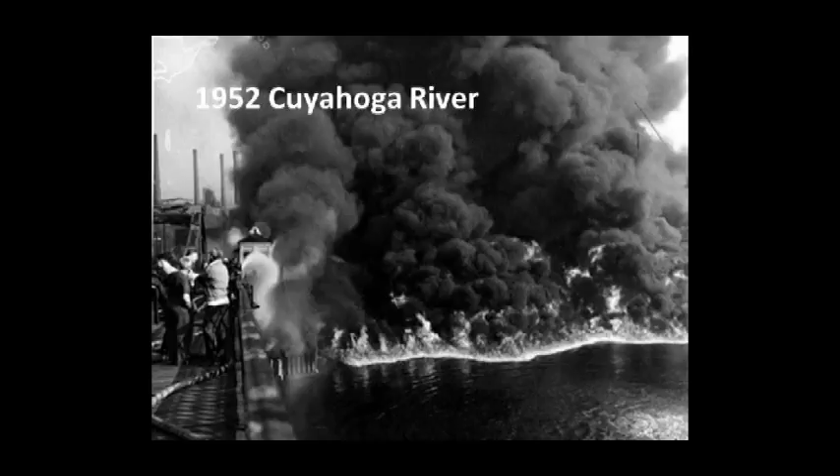I think it's important to really understand where we've been locally, so that we know where we need to get to in the future.

This is a picture of the 1952 Cuyahoga River fire, one of the biggest and baddest fires on that river. This river burned 13 times. Why is that? We were using the river back then as a sewer, essentially. And this is what you saw.

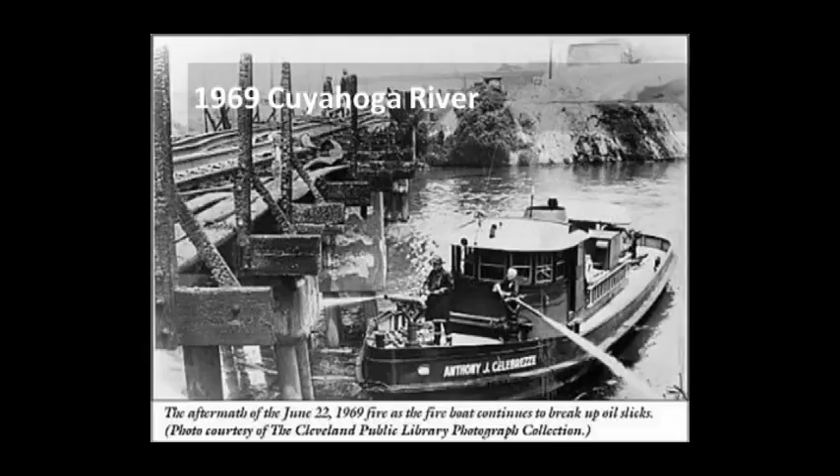This was one of the least disruptive fires, but one that garnered the most attention nationally. This was the 1969 fire on the Cuyahoga River that really sparked an environmental movement and ultimately led, 3 years later, to the adoption of the Clean Water Act, creation of the EPA, and a lot of good things in terms of cleaning up that river.

So today what we want to cover: we'll talk a little bit about the sewer district and our responsibilities. We're going to talk about the urban water cycle, one slide, but I think it's important for people to understand that we are taking water out of Lake Erie for drinking water purposes. You are using it, and it's our job to clean it up and get it back to Lake Erie to be protective of public health and the aquatic environment.

Sewer System 101 will cover the evolution of sewers, the first sewers in the region, how they've changed over the years, and some of the problems. We've got a wet weather day, so we're going to talk all about what wet weather means to sewer systems.

Once we collect wastewater from your homes and industry, we've got to treat it at our plants. Some of you will take a tour today. We'll talk in general terms about the treatment process, how we clean up the waste. And at the end, we'll show some graphs about some of the gains we've made in water quality, but also some of the issues and challenges we face going forward.

First, on the responsibilities: the district was created in 1972 by court order, because there were a lot of squabbles and lawsuits over service-related issues, water quality issues, basement flooding issues, a whole host of issues between all of the communities in our service area. So a court determined that a regional entity, known as the Cleveland Regional Sewer District, now the Northeast Ohio Regional Sewer District, would be tasked with taking on the big challenges, the inter-community challenges that the region faced.

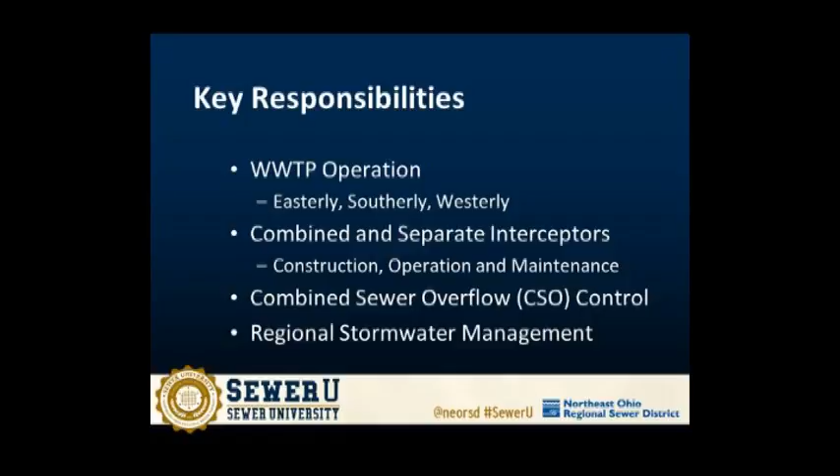We have the responsibility for what's called combined sewer overflow, and we're going to spend a good deal of time talking about what overflows are and what we're doing about them. And lastly, we're going to touch on regional stormwater management. I want to make sure people understand all the stressors on our streams and Lake Erie in terms of water quality impairment, and some of the programs we've got underway to deal with those.

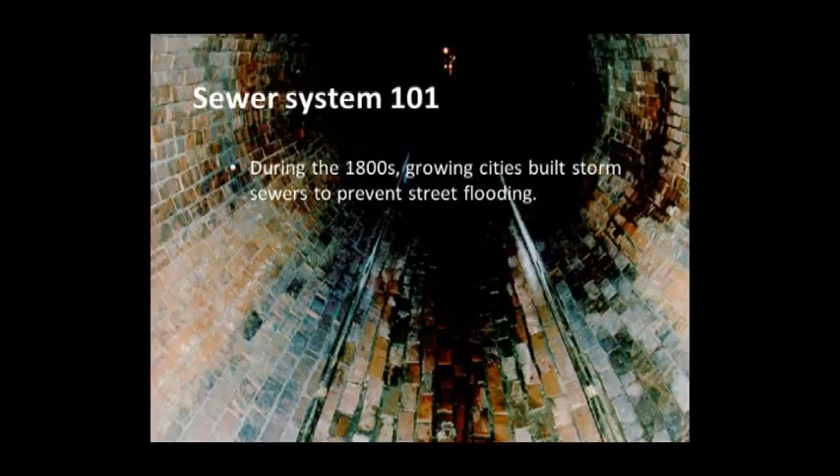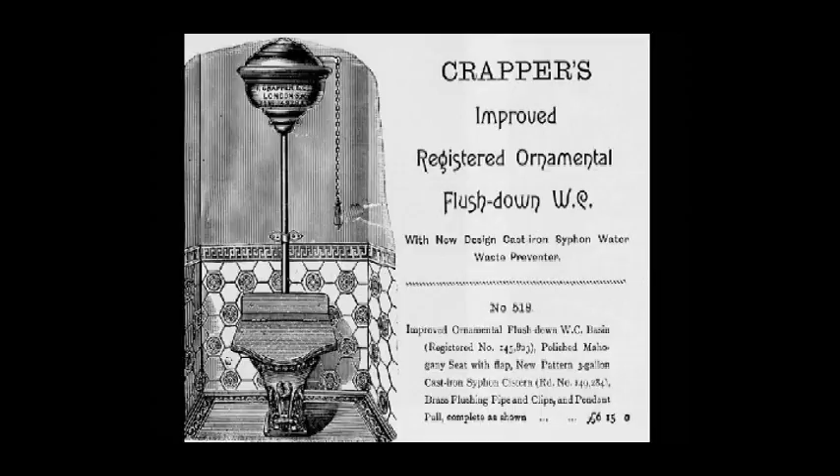Now this was the creation that really started things going, the crapper, the first toilet. I think this is vintage 1850s, 60s. Mr. Crapper invented a way to flush the waste from your house and get it away from you. It's a waste preventer, I guess it was called.

So that creation with water, the delivery of water to the residents of Cleveland, started to create much more waste that needed to be dealt with.

So in the 1880s and 90s, sanitary sewers from your houses, those little laterals, the pipes from your house, were connected to those storm drains. The reason was it was a mess on the streets. There's crap on the streets from the crapper, and we needed to get that waste off the street. That's a health problem.

So they started to connect the house laterals to these interceptors to get them off the streets, away from the people, and they started to divert those flows to a nearby water body, which at that time sounded like the right thing to do. There were no treatment plants back then. It was just collect the waste, collect the storm water, get it away from people, get it to the nearest body of water.

Now this is a quote, I think his name was Robert Hering, City of Cleveland, back in 1882, and he theorized that combined sewers was really the matter of choice. He called it a matter of choice because there was so much organic matter and junk on the streets, and I think there were still horses rolling around at some point. So you had a bunch of organic matter on the streets, and a lot of waste being generated because of inventions like the crapper and water coming to your house.

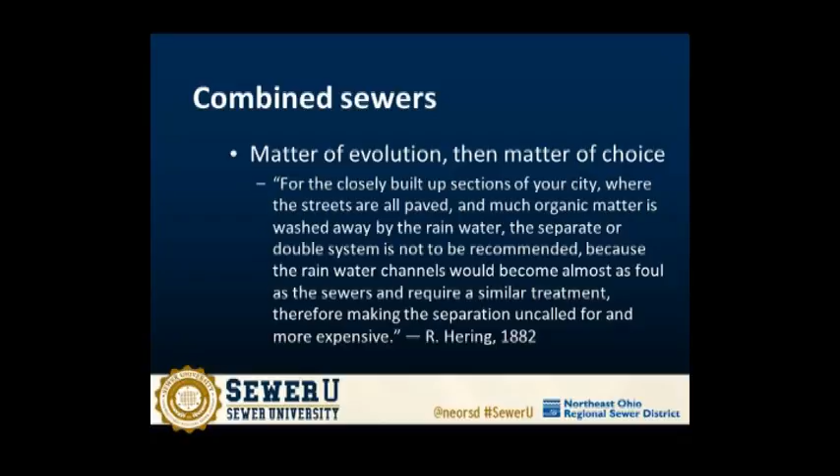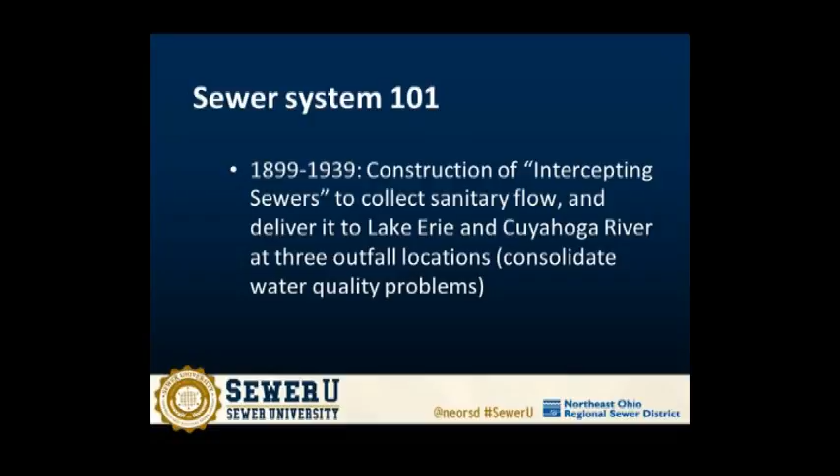So between the late 1800s and early to mid 1900s, intercepting sewers were constructed to start to intercept these waste flows and delivered those flows. There was a piecemeal construction of sewers to get the flow away from the people. Then we wanted to consolidate all these piecemeal sewers into what we call an interceptor, and get it to the lake or get it to the Cuyahoga River in a convenient spot.

And that's what they did. Now, interestingly enough, the locations of these interceptors and where they outfall to the river are really the exact locations of the Easterly, Westerly, and Southerly treatment plants today.

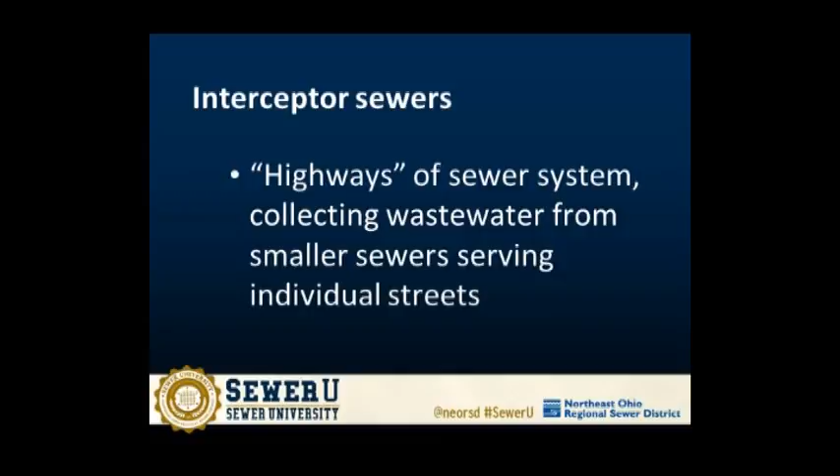So our interceptors are the highways of the sewer system. They collect waste. At that time, they collected wastewater and took it right to the river or the lake. Today, they collect waste from the community sewers and take that waste to our treatment plants. Again, dilution is the solution to pollution.

That was the mantra. I'm a lifelong Clevelander, and I remember in the late 60s and early 70s some of the bumper stickers that said that: dilution is the solution to pollution. And what we've learned over time is that is not true. It certainly wasn't true back then, and they quickly realized that taking waste to 3 points along the lake and the river was not the right solution.

So as treatment plants were constructed in this area, nationally, I think this area led some of the earliest treatment plants across the country. There's great debate as to who was first, Easterly, Westerly, Southerly, and what was the first date. But some of the rudimentary treatment plants were constructed as early as the 1920s.

In '38, some of the more sophisticated plants that we see today were constructed at those 3 outfall locations, because it was now felt that we've got to treat this waste. It's harming Lake Erie, it's harming the Cuyahoga River, and we've got to do something about it.

So now we're going to talk more about the combined sewer system and its evolution. As the area continued to grow, devices were built into the combined sewer system called regulators. You think of them as a dam. These regulators allow flow to go to the treatment plant in dry weather and in wet weather.

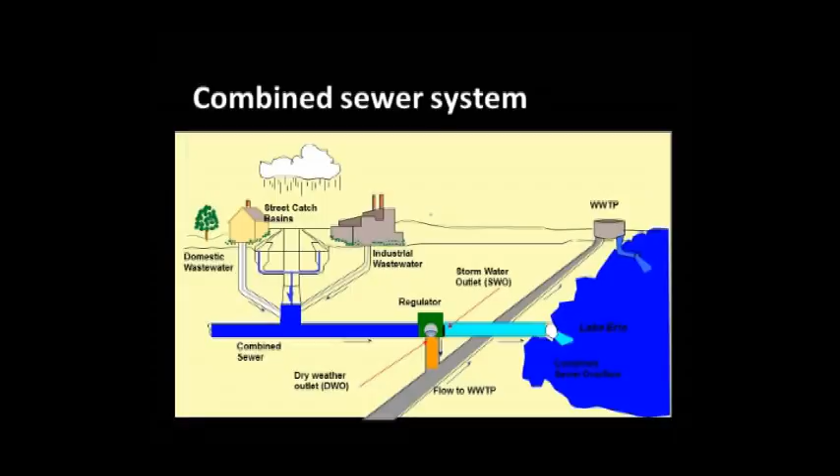But because there was a lot of street flooding and basement flooding when these combined sewers filled up, some of that flow was allowed to overflow to the nearest water body. It was really to keep it out of the basements or out of the streets. And those are called combined sewer overflows.

This is what it looks like inside the pipe. There's a couple different configurations for these regulating structures. You've got side spill weirs to the left, overflow pipes to the top right. In dry weather, the flows are typically pretty low in the system, and all the flow gets to the treatment plant.

When it rains like today, those combined sewers start to fill up because of the street runoff, and what we see is the flows in the sewer elevate. They get to a point where to the left there's a weir, a long weir, like a dam. Once they exceed the height of that dam, that's a combined sewer overflow. Those flows are no longer going to the treatment plant, they're going to the nearest water body.

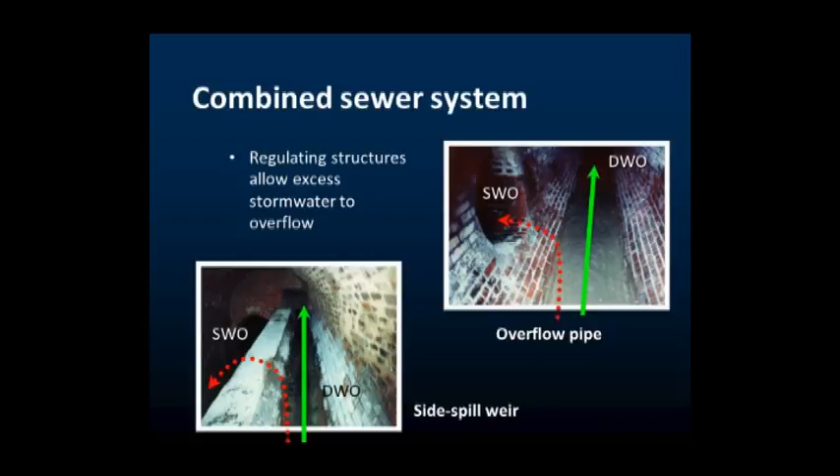And all of our urban streams in our service area receive at least one combined sewer overflow, and many of them, like the Cuyahoga, Mill Creek, and others, receive numerous combined sewer overflows.

Newer configurations: back in the 70s, the district and I think Milwaukee were some of the first pioneers of what we call automated regulators. Some of the bigger interceptors that had a lot of capacity to store flow during wet weather, we built automated devices, either inflatable dams or hydraulically operated gates, and we raise the dams when it's going to rain to allow the flow to back up and fill the pipe to a point where we're preventing overflow, and then once the rain has ceased, all of that flow can discharge to our treatment plants.

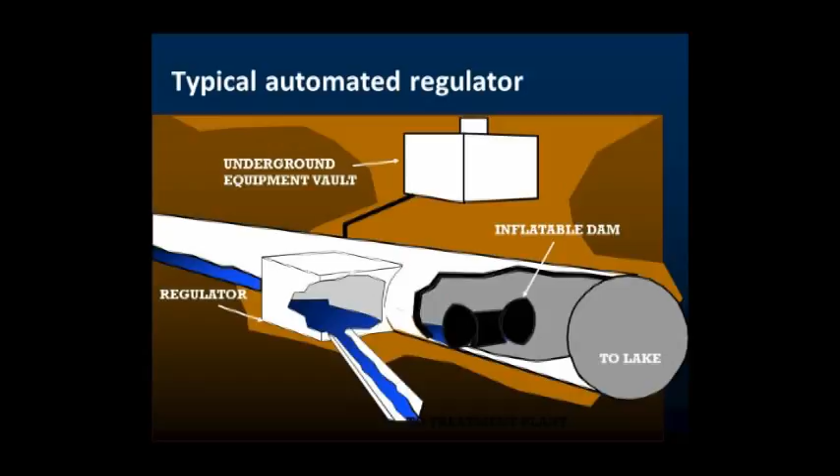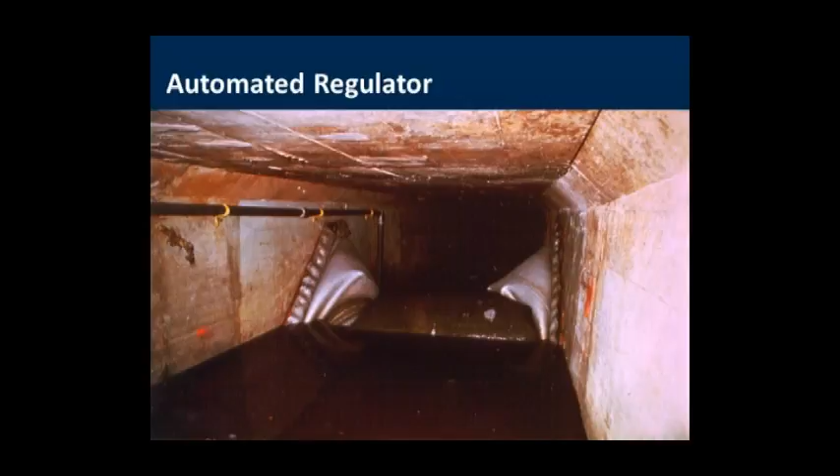This is an example of an inflatable dam, partially inflated, but as the bag comes up, the flow ponds behind it. If we didn't have the bag, that flow might overflow to the environment. This was a measure performed in the 70s and 80s to start whittling away the combined sewer overflow totals that this region faced.

Back at our inception, we're estimating over 9 billion gallons of combined sewer overflow. We're talking raw sewage mixed with stormwater overflowing to the environment.

This is what it looks like when it hits a stream, and this is kind of an odd photo. It looks very picturesque, doesn't it? That water flowing over those rocks coming out of that flap gate looks great. That's combined sewer overflow. That's a raw sewage discharge.

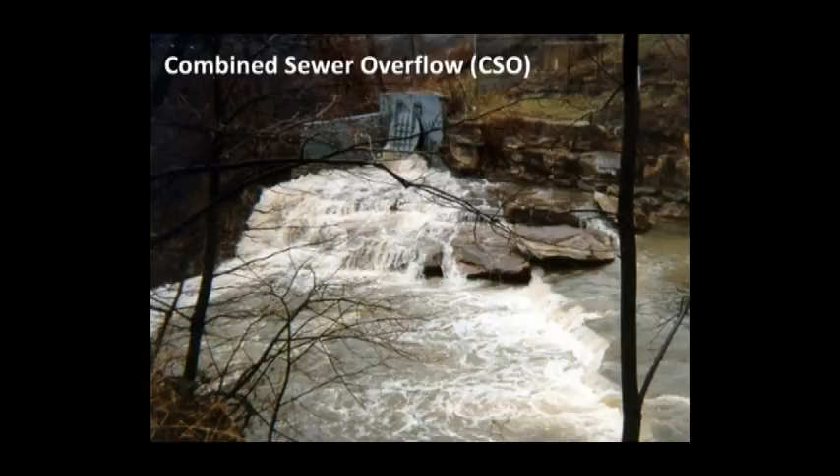Now the good news, and this is on Mill Creek, at the Mill Creek Falls. The good news about this is this was once a very frequent actor. I think this one overflowed at least 100 million gallons per year, numerous times. On a day like today, it'd be overflowing.

Through the construction of the district's Mill Creek Combined Sewer Overflow Tunnel and a number of other ancillary projects, that overflow is gone. It's physically gone. The flap gate's removed, the rocks were reconstructed, and it's actually an overlook now. I believe it's a Metro Parks overlook, which is a really good thing. It's a nice gain forward.

But all of the other urban streams in our area, Dugway Brook, 9 Mile, Euclid Creek, Green Creek, and others, receive at least one or multiple discharges.

Combined sewer overflows, CSOs, impact water quality because you have a mix of wastewater with stormwater, and stormwater is not pure. In an urban environment, stormwater running off the streets or your yards is contaminated with metals, brake lining, oils, greases, dog poop, and the natural environment. So stormwater is also contaminated.

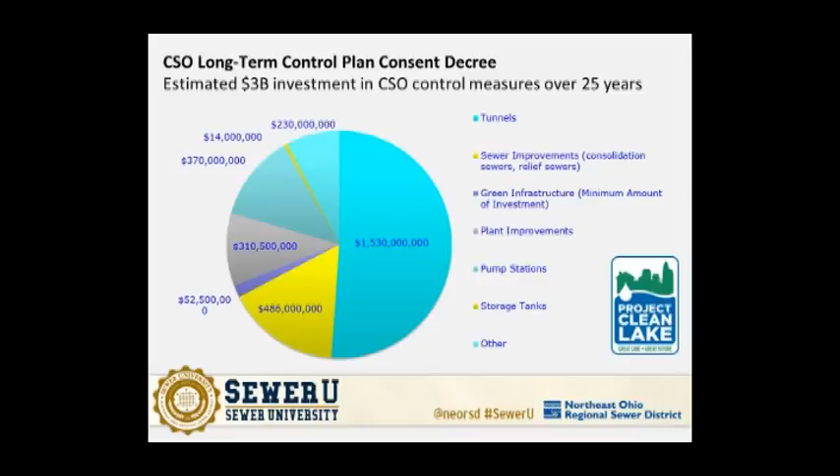Without getting too technical, this pie chart gives you some idea of the types of projects in the $3 billion program. The light blue is the tunnels. That's really the guts of our program: building large storage tunnels underground to take those overflows we're discharging to the stream and drop them into the tunnel. The tunnel is a large, 24-foot diameter structure. Euclid Creek was our latest. These are very large, holding 70 million gallons or more of overflow.

We drop the overflows into the tunnel, so they're not going to the stream anymore, which is good. The tunnel holds those flows, and we take them to our treatment plant for full treatment, which is also good. So that's a very significant water quality gain in any area we're working on for combined sewer overflow management.

There are a number of other projects, including green infrastructure projects that the district has pursued and will continue to pursue. One way to manage combined sewer overflows is to get stormwater out of the combined sewer system. Where there are available properties and green space to allow rainwater to percolate or slow it down and hold it for a while, we're taking advantage of those opportunities.

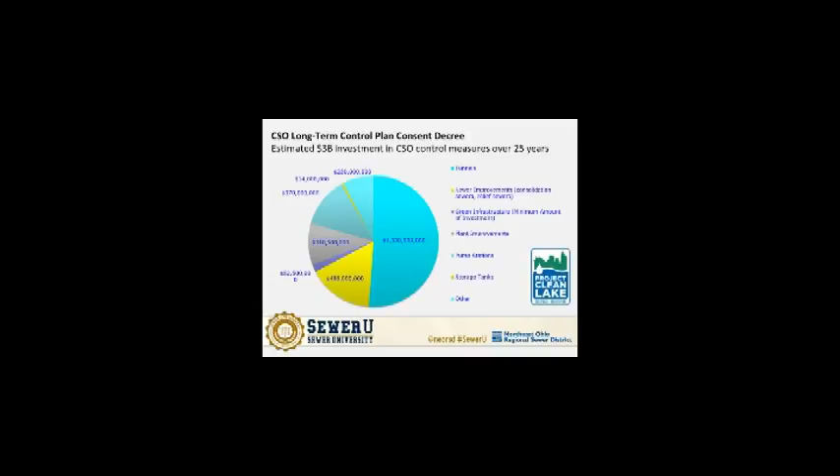There are a number of plant improvements on this graphic - I think it's the 310 million dollar total. So there are some significant upgrades at the treatment plants to provide more capacity and treatment ability in wet weather so that the treatment plants can continue to perform. That's a key component. Good question.

Bid at 198, came in at 195, which is good. And this tunnel is finished, it's waiting for flow. As soon as that pump station is complete in 2016, sometime during 2016, we will turn that tunnel on and start to see overflow discharges going into the tunnel and away from the beach.

That's the cutter head on the Euclid Creek Tunnel - I think they named it Mackenzie. There's diamond bits on the cutter heads. We dropped this machine - I think it's 300 to 600 feet in length. It's dropped into the tunnel, constructed there, and then the mole is in the hole and it goes for 3 miles. It takes 2 to 3 years to mine out, and we're between 120 and 200 feet deep. So this machine is mining in rock.

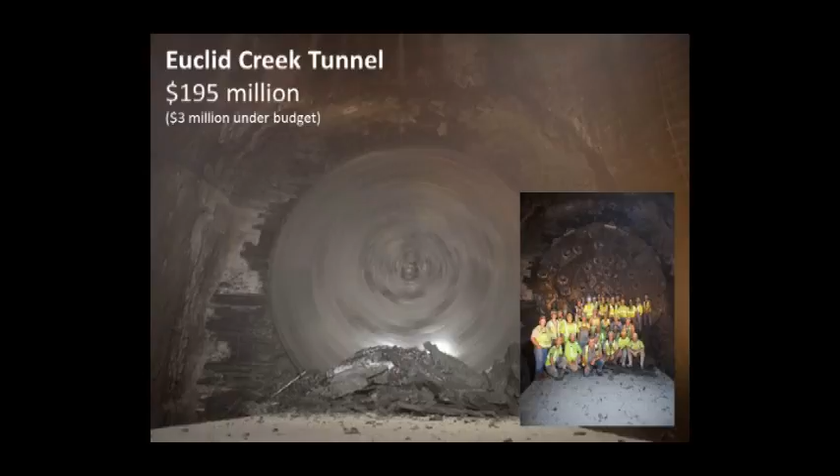That's the cutter head breaking through at the terminus of the project. Obviously for the construction workers this is a big day, so they've got a big ceremony going on. This project worked beautifully - tunneling underground can be tough, but we had no major issues, on schedule and under budget. And that's what it looks like inside.

These tunnels are lined. Once you mine - and it's shale, Chagrin shale - once you mine it, you line it. It's a concrete liner that followed the machine step by step as they were mining. And that gives you some scale for how big these tunnels are.

For the mining, did that go through any residential area? Like, what did it feel like to have that thing going under your street?

Typically, we try to stay within the right-of-way. We don't like to mine under houses and structures, but we have to, because you cannot turn mining machines on a dime - there's certain radiuses and curves. We're a couple hundred feet deep. Sometimes there's blasting involved; where there's blasting, we do pre-surveys for the residents to make sure there's no damage caused by our tunnels. When you're 200 feet down, the impact at the surface is typically negligible or non-existent - it just depends on your depth and the type of mining you do.

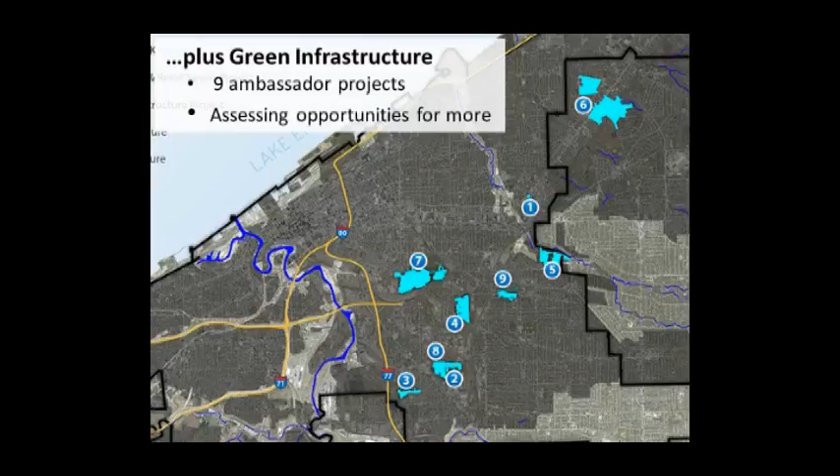If you can keep water out, that's less potential for water to overflow during a rain event. This is an example of a green infrastructure opportunity at the Marriott redevelopment. This is in the University Circle area.

There's sand underneath this site. Our area is pretty heavily laid with clay, which is not great for infiltration, but there are sand pockets, old beach ridges. This area happened to have sand underneath, so it was ripe for infiltration to take the stormwater off the parking lots and the impervious surfaces and send that water into the sand and keep it out of the system.

This thing's worked beautifully. It's been in operation a couple years now, and there's been no stormwater runoff coming from the site up to 100-year storms. We've been heavily monitoring this. That site would have generated a pretty significant amount of stormwater runoff before the technology was put in to the combined sewer system. We're not seeing it. So that's a good example. Now, we don't have that opportunity everywhere, but where we do, we want to take advantage of it.

Public Square, you've heard a lot about transforming Public Square. We wanted to make sure at Public Square, since you're creating green spaces and changing the landscape, we do the right things to capture stormwater through green infrastructure—either reuse it, hold it, or get rid of it. So there are some significant district investments in the Public Square project to use green infrastructure technologies to pull water out of the combined sewer system.

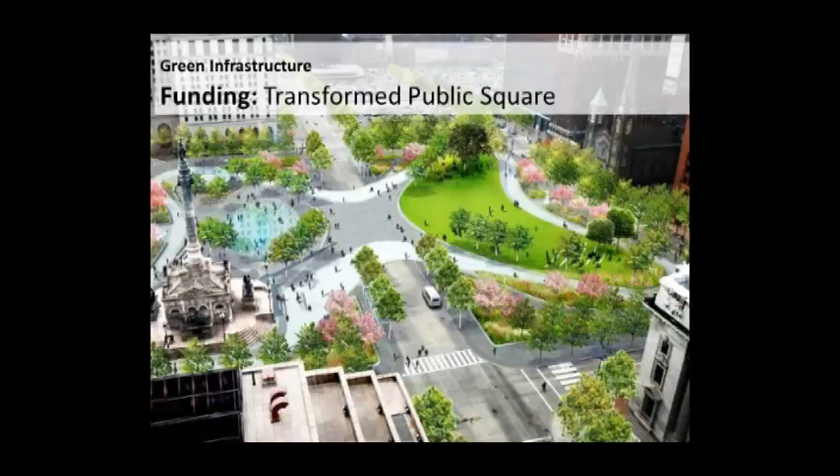We've got a quick video that explains some of the work at Public Square. Dave Ritter, Stormwater Technical Specialist with the Northeast Ohio Regional Sewer District.

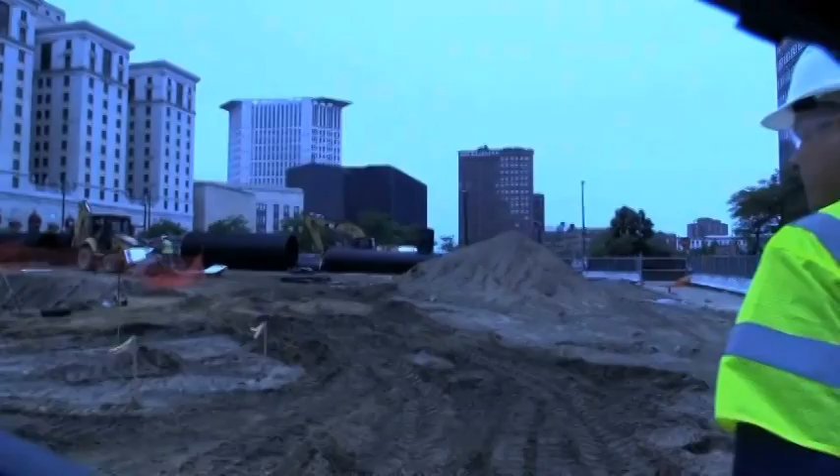Today we're here at Public Square to take a look at the rainwater harvesting and infiltration system that's going in as part of the project. Originally, the runoff from Public Square was caught in catch basins and directed to the combined sewer system. The combined sewer system during dry weather flows to our Easterly wastewater treatment plant. During large storm events, it was designed to overflow, and those overflows went directly to Lake Erie.

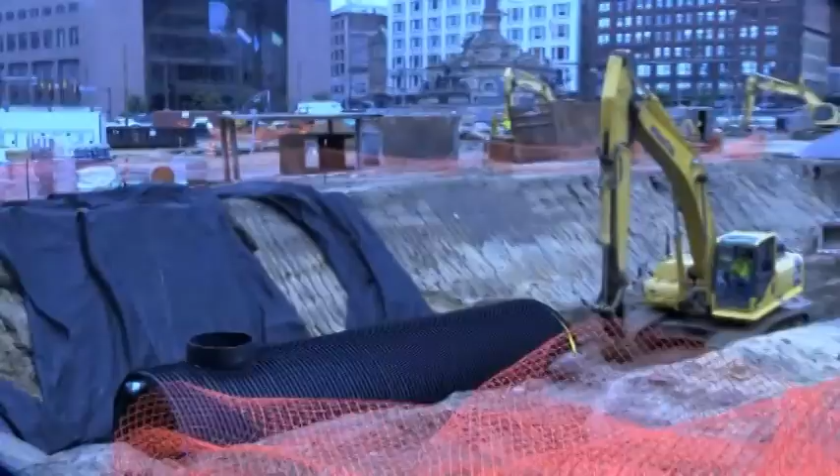The sewer district saw this as an opportunity to capture stormwater in a highly urbanized environment, and was able to work with the Group Plan Commission to leverage the work that was already going on here at Public Square. There are two systems going in as part of the Public Square project. The one behind me is the rainwater harvesting and infiltration system.

Rainwater runoff from the site is going to be captured and reused for irrigation. During the times of the year when irrigation isn't necessary, the water will overflow and infiltrate into the ground itself, thereby capturing about 1.6 million gallons. Between the two systems—the rainwater harvesting and infiltration system, and the perimeter permeable paver tree infiltration system—it's designed to capture about 3 million gallons a year.

This is a once-in-a-lifetime opportunity to do some improvements right in a highly urbanized downtown area to remove stormwater runoff from our combined sewer system.

So it doesn't look like they're super far along.

Okay, so that's it on combined sewer systems and combined sewer overflow. The combined sewer system essentially brought the region from waste on the streets to waste being directed to treatment plants. But as the area continued to build out, we laid more streets, more property, more impervious surface, so there's more stormwater runoff. Combined sewer overflows came to be because of the outmigration and the building out of our region.

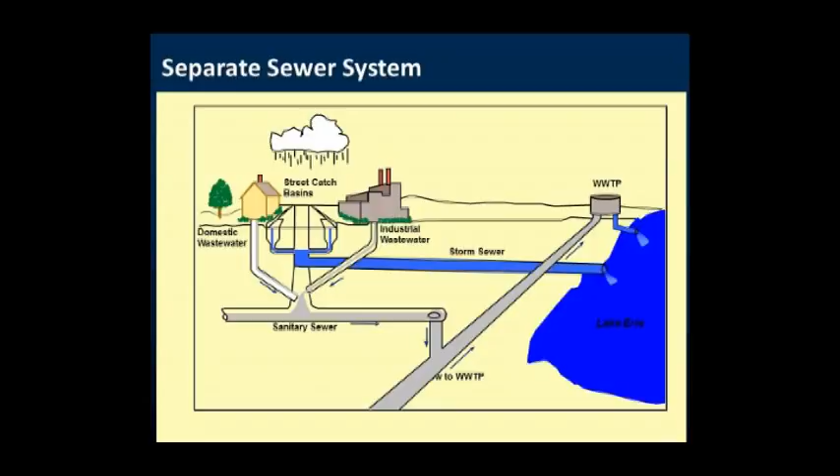As we continued to build out, now into the 1900s, separate sewer systems came to be in this region. A separate sewer system differs from a combined sewer system in that we have two separate sewers. One's a sanitary sewer that collects waste from your homes and industry and takes that waste to a treatment plant. A storm sewer is also in the street to collect rainfall runoff from streets and from your properties, and the storm sewers are routed to the nearest stream or directly to Lake Erie.

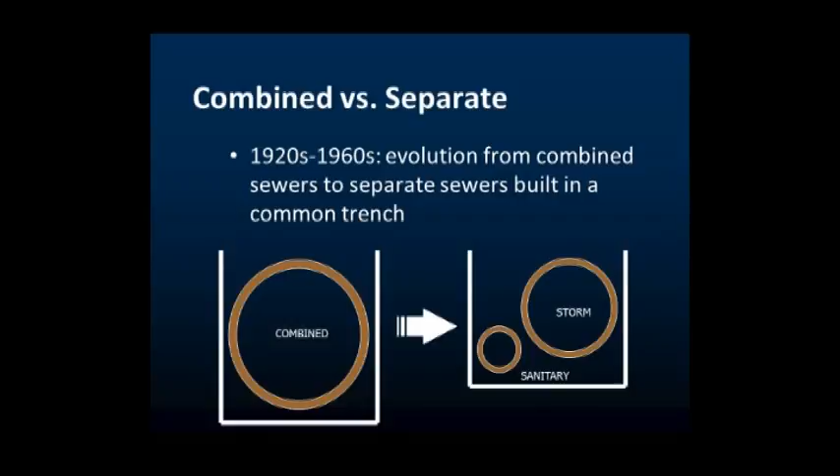Separate sewers evolved over time, not just here in Cleveland, but nationally, although there are some unique sewer systems in the Cleveland area and a little bit in northern Kentucky that are kind of unique to this area. I really don't know why. Perhaps it was the contractor at the time.

But the first evolution was to take, instead of a combined sewer, a separate sanitary and storm sewer, but dig just one trench. Obviously I think it was a cost savings, and there's a lot of rock in certain areas, so it can be expensive to mine through rock. But they put the sanitary and the storm sewer in the same trench. Now when you dig a trench, trenches fill with water. So the problem is, even though you have separate sanitary and storm sewers, because they're in the same trench, there's a lot of potential for intermingling of flows.

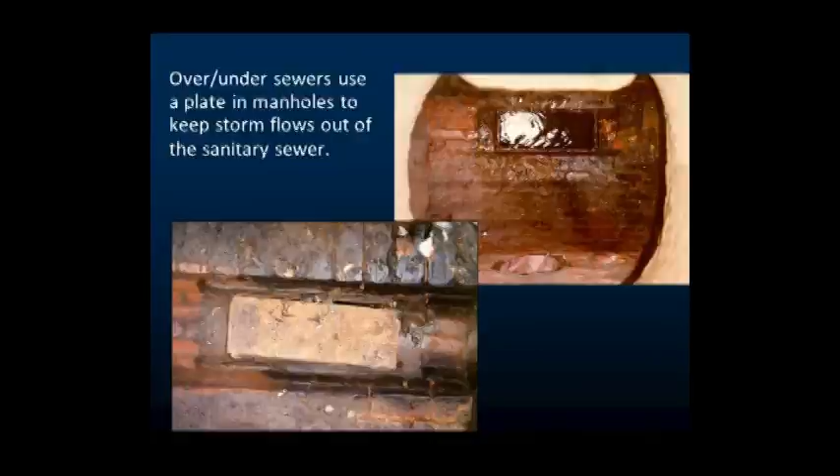So that was the evolution from combined to separate. The true separate systems, where we built sewers in separate trenches, was the next evolution. They even predate the 60s, I'm sure, in certain areas. But now we started to dig separate trenches, one for the sanitary, one for the storm. These tend to be tighter systems, but these are very old systems in our area - some are approaching 80 plus years or 100 years old. So there are a number of other problems which we'll talk about.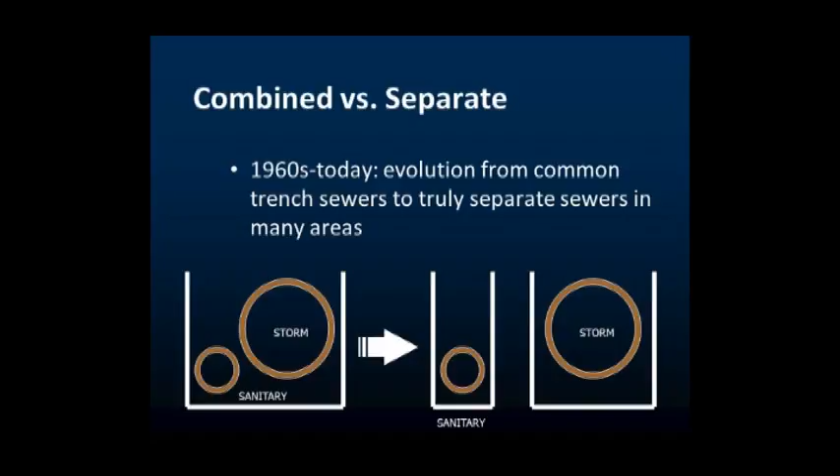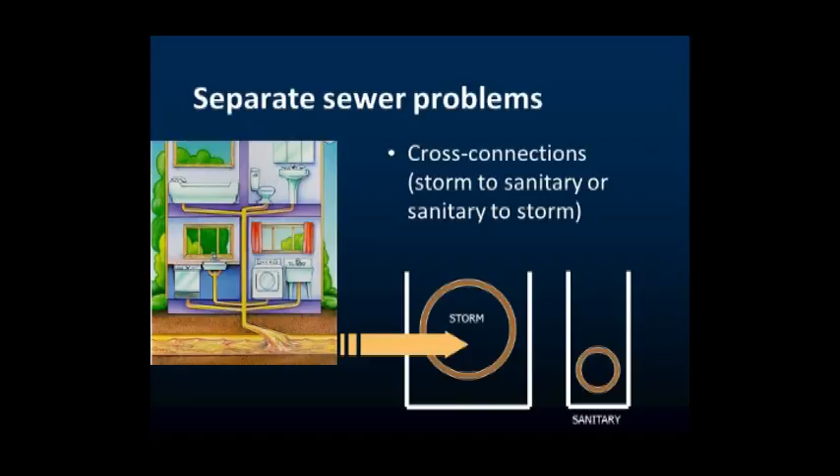Separate sewer problems - just because you have two sewers doesn't mean you have no problems. We have plenty of problems across our service area in the separate sewer area. There's a number of things that can happen. First is cross connections. Your downspouts on your house are supposed to be connected to the storm sewer lateral, the little pipe that comes off your property, so all that rooftop water is not supposed to be in the sanitary sewer, it's supposed to be in the storm sewer. In some areas it's not.

In the transition, some engineers back in the day felt that because we're taking all the storm water out of the system and we're not going to have a combined sewer, the stuff you flush down the toilet is going to settle. We need some flushing capacity to flush that waste so you don't muddy up your sewer system and block it up. So they intentionally connected footer drains, foundation drains, or downspouts, because that was the thought at the time. So you really can't fault them. Those downspouts in sanitary sewers cause problems.

We have other problems on sanitary sewers. Because we have the wrong connections, we have storm sewers tied to sanitaries, but we also have an issue where a lot of the sanitary sewers from the homes are tied to the storm sewer. So people are flushing their toilets to the stream, and this is a bigger problem than you might think. It depends - if a contractor comes out to fix a problem and you don't have good inspection, they're going to tie that pipe to the closest pipe they can see, and sometimes it's the right one, sometimes it's the wrong one. We call these illicit discharges, and we're very diligent at finding and looking for these, working with communities to get them corrected. It should not be happening in the 21st century, people flushing toilets to the stream. But it happens.

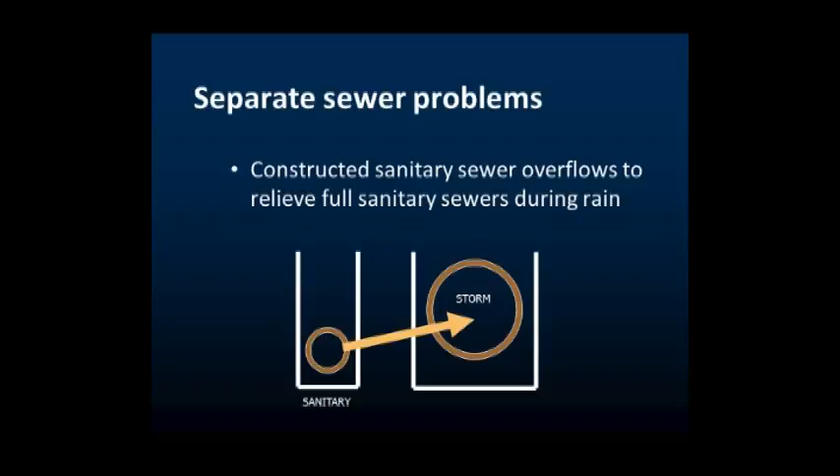As the system built out and grew, the capacity of the sanitary sewers started to be compromised. These sewers got old and have cracks and leaks. One thing people need to understand is that about 50% of the sewer system by length is on private property, roughly a 50-50 split. The homeowners own that portion of the sewer system, while the public entity owns the sewers in the right-of-way. As sewers age, cracks and leaks can occur on either side of the fence.

It's tough to deal with private property issues, so correcting basement flooding is a dicey proposition, partly due to the reluctance of certain communities to spend public money on private property, and the reluctance of property owners to do the same. It's a very tough situation, and not just here—it's nationwide.

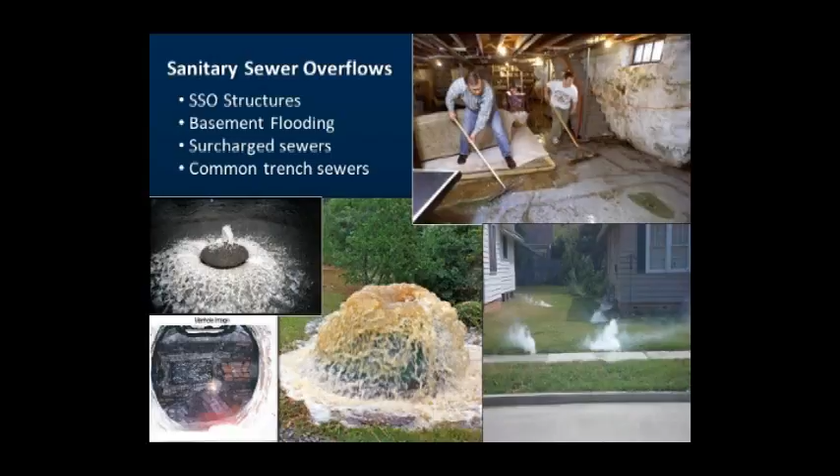When we overload sanitary sewers, we see this happening a lot lately in every area. It's not concentrated in any one community. Some communities have older sewers where it's more problematic, but you can get what we call surcharging manholes—you can actually blow manhole lids because the system is under pressure from too much water in the sanitary sewer.

So it'll either pop the manhole lid and spout geysers, or back up flow and spout geysers in your basement, filling it with a combination of stormwater and wastewater. Obviously a huge health hazard and a big issue, and it's all caused by extraneous stormwater getting into the sanitary sewer system.

Inflow is more of a direct connection with lots of water—like a downspout that's supposed to go into the storm sewer system, but sometimes comes into the sanitary sewer instead. Not a good thing, since you didn't build capacity for downspouts in your sanitary sewer. Same thing in the streets: catch basins collect street runoff, and once in a while a street catch basin is tied to a sanitary sewer, which is a huge influx of stormwater that can quickly overwhelm the system.

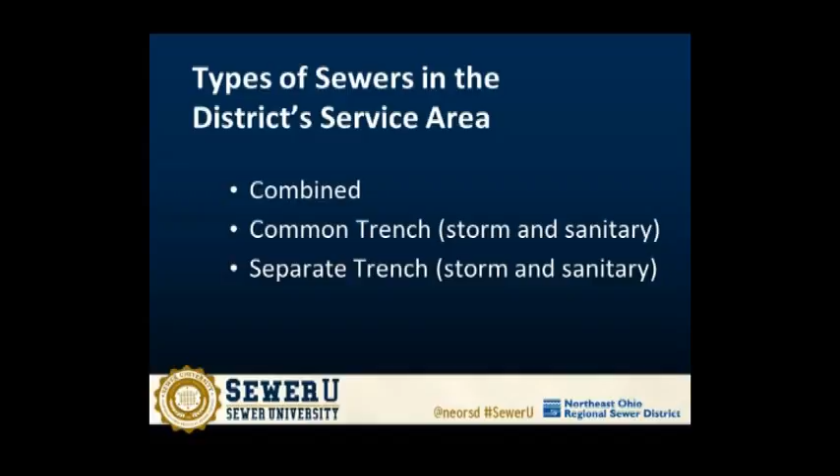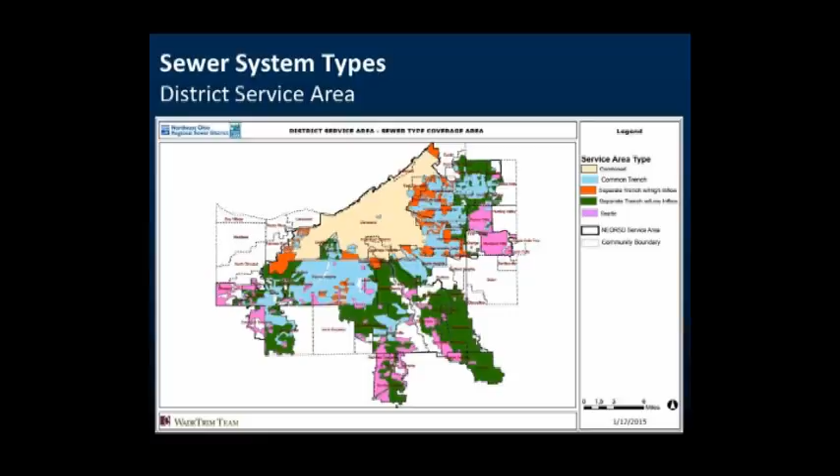To put it in perspective, we are a regional entity. We've got the highways, the interceptors, so we've got about 312 miles of pipe. We're dealing with wastewater treatment plants, making sure the interceptors are functional, and dealing with the combined sewer overflow issue. That's on the district's plate.

In the communities, there's more than 10 times the amount of sanitary and combined sewer pipe, and these are just the lengths in the public right-of-way. This doesn't include miles of pipe on private property. You can essentially double that total. And those are the responsibility of the communities.

So when we have basement flooding, when we have illicit discharges, when we have septic tank issues, those fall on the community to deal with it. But obviously these systems are linked, so we've got to work together to solve the problems that exist.

Question: with the district-owned pipe and the locally owned pipe, does the $3 billion cover the district-owned pipe, or does it cover both district and locally owned? The $3 billion of investment are targeted at, really, more district-owned facilities, so it's pipes or overflows.

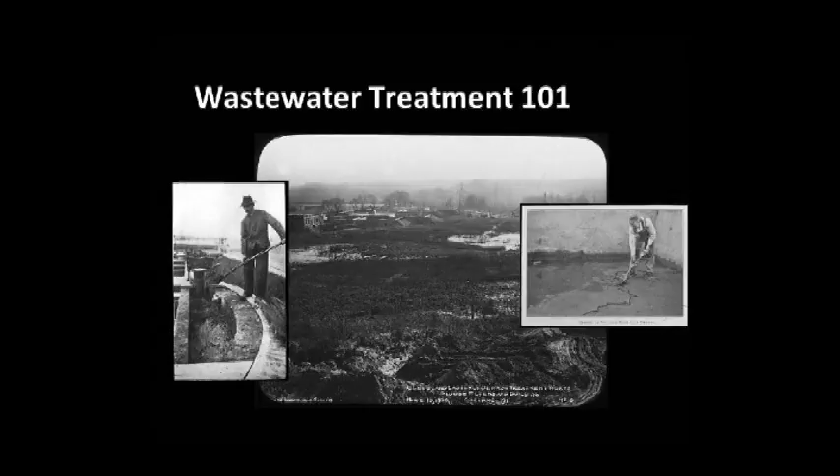Okay, I'm going to now shift to the latter part. We're going to go through wastewater treatment plant 101. Now we've collected the wastewater, we're starting to build facilities to prevent overflows, but we're delivering a lot of flow to our treatment plants. So these are some pictures of construction way back in the day—we're talking the 20s and 30s, where treatment plants were built locally.

Secondary treatment: because there's a lot of organics in the waste stream and other pollutants, we introduce microorganisms, bugs, that like to chew and feed on organics. As they chew and feed on organics, they reduce the level of organics, and we allow them to settle out. Then at the end, we disinfect, using sodium hypochlorite, bleach, to kill off any E. coli organisms that remain before we discharge.

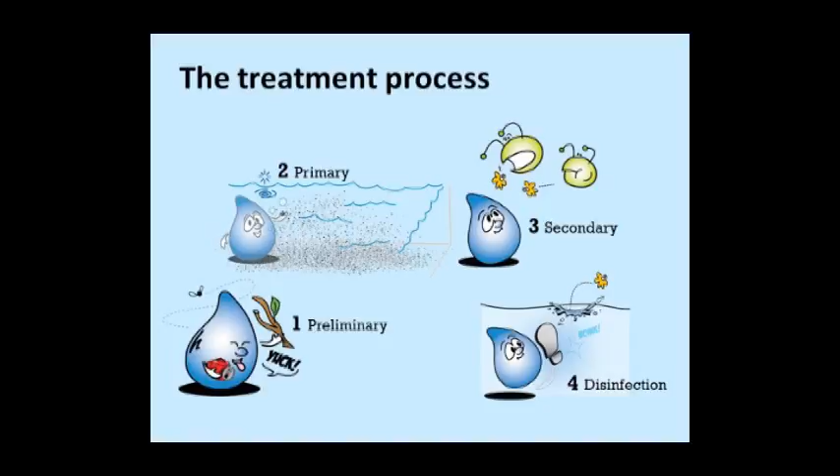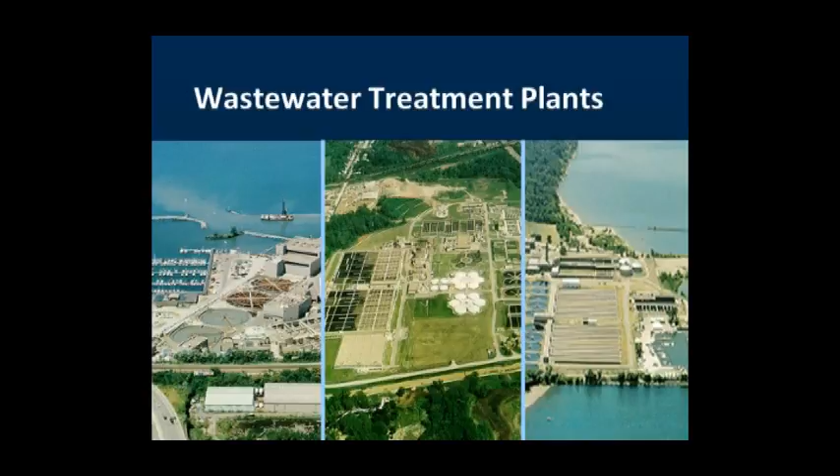These are pictures of the 3 treatment plants again: Westerly on the left, adjacent to Edgewater State Park; Southerly, which some of you will tour, in the middle; and Easterly at East 140th and Lakeshore Boulevard. Southerly discharges to the Cuyahoga River, while Easterly and Westerly go to Lake Erie.

Frank? Yes? I know there's a lot of construction right now at the Easterly plant. How's that gonna compare to Southerly when all of that's done? Southerly's going to have its fair share.

All 3 treatment plants, we will build some facilities to augment and increase the wet weather treatment capacities, like your question earlier. We're going to build facilities to make those treatment plants able to treat more wet weather flow annually. So we looked at what the combined sewer system might bring, what the treatment plants can do, what the regulations say, and we're going to upsize the capacity at all 3 units. There'll be significant construction at all 3 plants.

Is that chemically enhanced high-rate treatment? Chemically enhanced high-rate treatment at all 3 plants, with some upsizing of the secondary capacity at Easterly. Same thing at Southerly, we're going to increase the amount of secondary units, taking Southerly from 400 million gallons per day to 615 or 625.

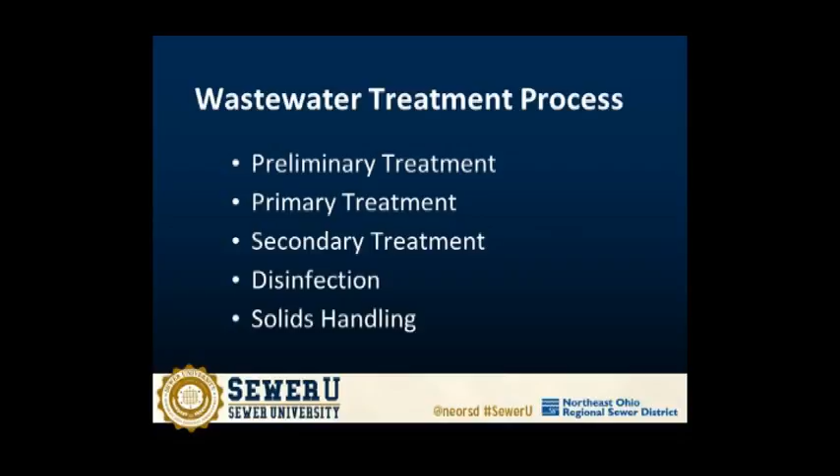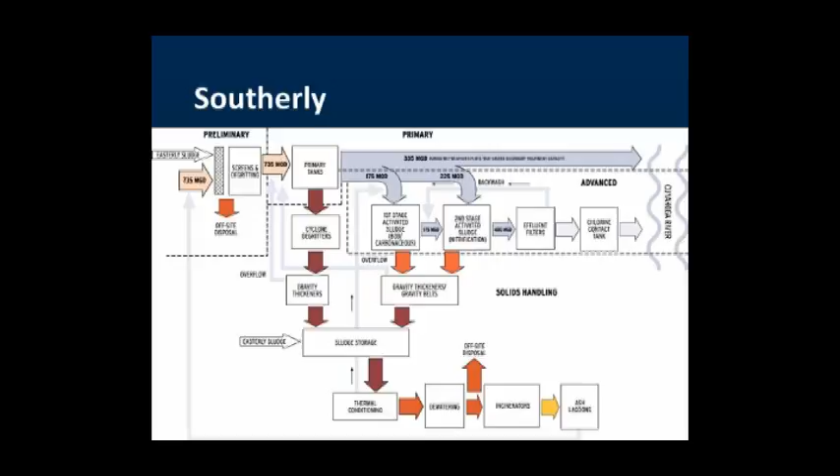You're going to go to Southerly. I don't want to get into a lot of detail, but you can see there's a lot of detail at these treatment plants. From when you bring the water in at the head end in preliminary treatment, you send it to primary, then secondary, and finally disinfect and discharge. The red arrows are the solid stream, where you're dropping solids out in tanks that need processing and removal. The light gray or blue is your wet stream, where the wastewater goes through units and gets cleansed unit to unit to unit. By the end, after you've disinfected, we're sending what we call effluent, treated wastewater, back to Lake Erie or the Cuyahoga River, well below the standards that EPA, Ohio EPA sets for safe swimming, aquatic environment, and protection of public health.

Preliminary treatment: the first thing that happens is the wastewater goes through bar racks. These are long vertical bars with different spacing, sometimes 2 inches apart, sometimes 3/4 inch apart. They've gotten smaller over history as there's been much more emphasis on making sure floatable materials are minimized. So the bar racks take the rags and junk out of the wastewater to protect downstream equipment.

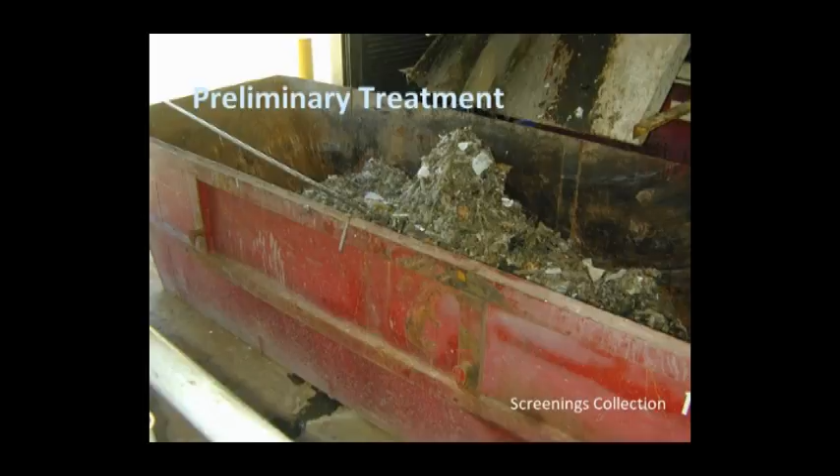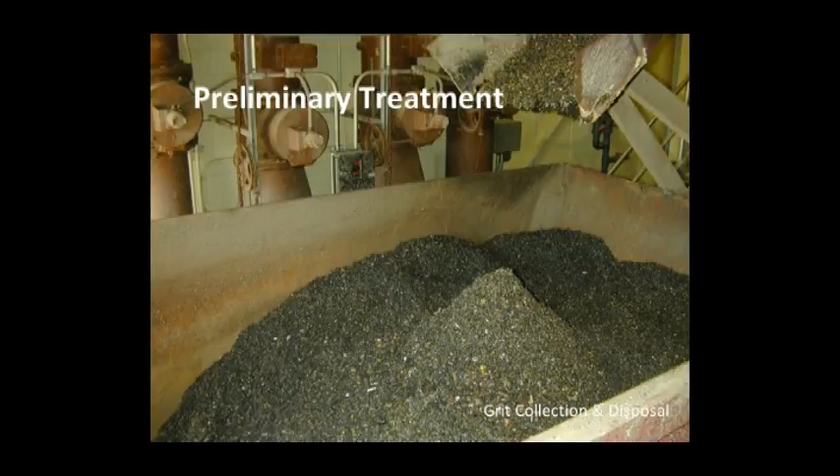The tanks are sloped to allow the grit to collect, and there's a series of rakes that continually move on a conveyor and rake out the grit for disposal. That's what grit looks like going to disposal. It's very abrasive, looks like coffee grounds. Half of it probably is, but that's what grit looks like.

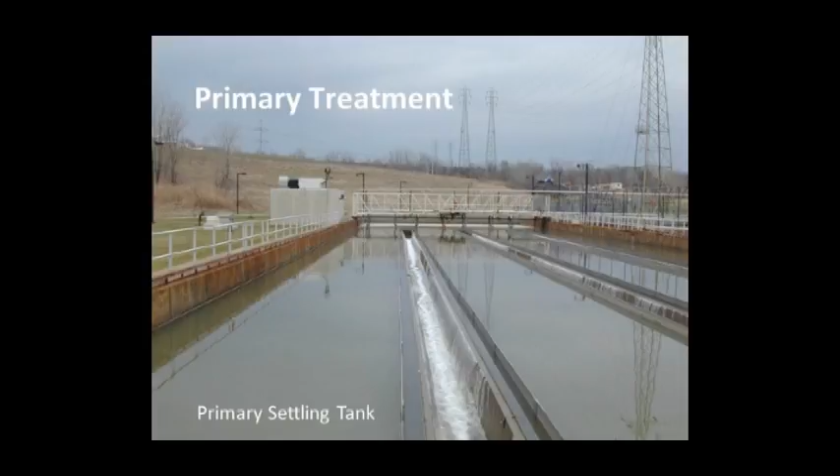Primary treatment - these are the tanks at Southerly. All we're doing is slowing the wastewater flow down. When you slow the flow down, solids that want to settle will settle. So the flow can be in these tanks for hours. I think Westerly's time of travel was, depending on the flow rate, 18 to 24 hours total for the whole plant. So there's a lot of what we call residence time to allow things to settle out.

Secondary treatment - we're using bugs, microorganisms, to chew on organics and reduce organic pollution. If you don't, and you discharge organics to the water body, it robs the water body of oxygen. That was the problem we had along the Cuyahoga and many streams back in the 50s and 60s - we had no oxygen in the stream because there was too much organic pollution. So that's their job. We use aeration systems - these bugs need a lot of oxygen to thrive. So there's a lot of oxygen input into the secondary treatment system to maintain a healthy bug population.

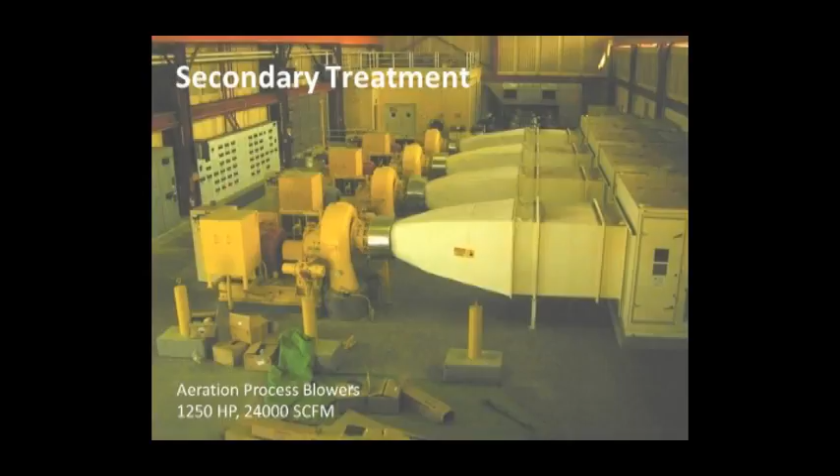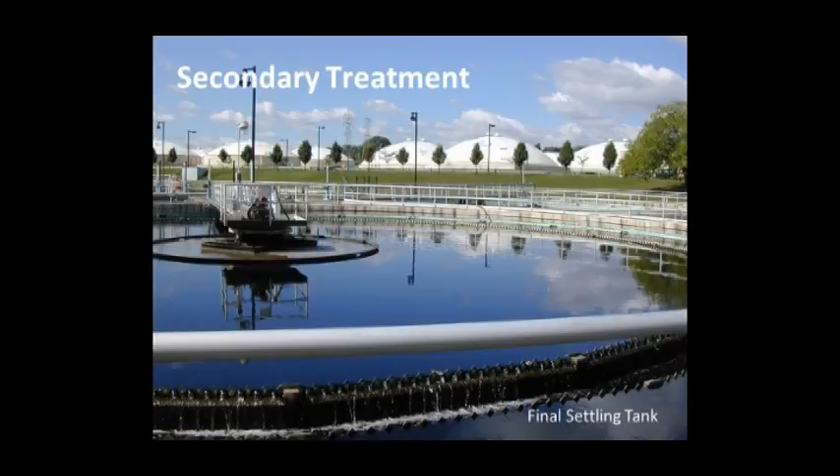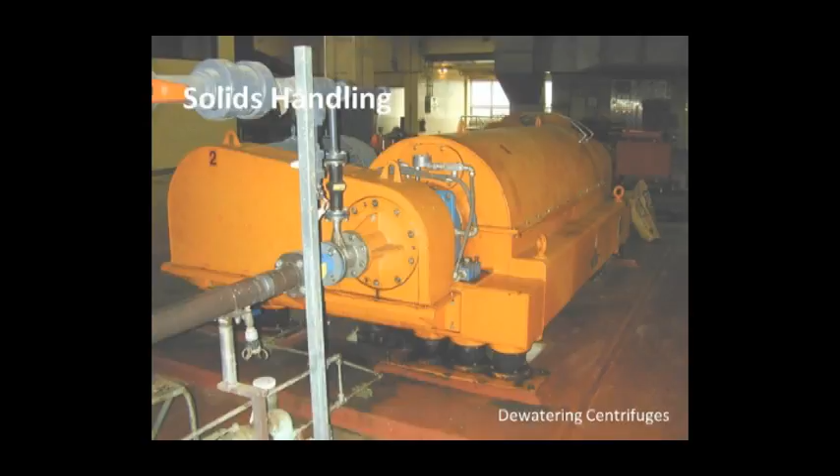Solids handling - we're producing a lot of solids. When you have 500,000 people discharging to a treatment plant, there's a lot of solids being produced daily. So this is a big deal, and it's very costly to deal with solids. We incinerate solids - some people landfill, some compost, some land apply, some incinerate. Each technology has its pluses and minuses. The district has been incinerating its solids prior to landfill from way back, and we've just constructed a new facility to deal with our solid streams at our treatment plants.

Question: Is there air pollution that results when you incinerate the solids? Good question - yes, there is. When you're burning, you're obviously producing off gases. We're regulated under the Clean Air Act on the incineration stack gases. So in conjunction with the incineration process are the technologies we have to build around incineration to essentially scrub out those stack gases, and just like a treatment plant, there are pollutant discharge limits on the stack gases that have to occur.

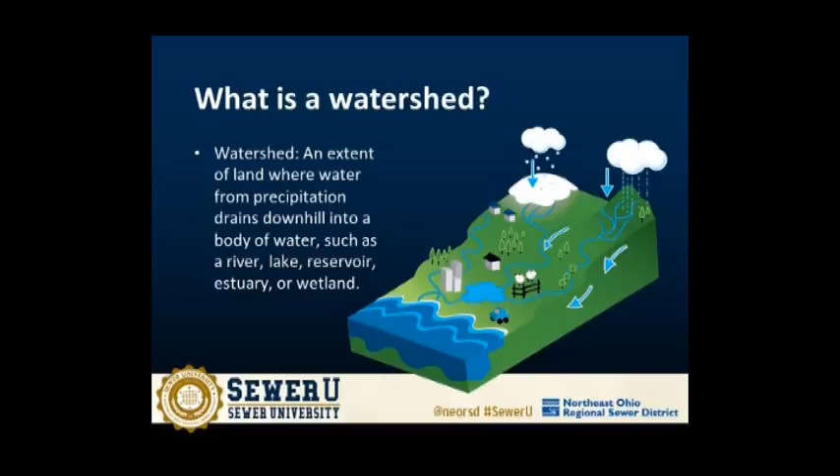There's a lot of smaller sub-watersheds: Mill Creek, Big Creek, West Creek, Euclid Creek, Green, Dugway, Doan, Nine Mile. There's a ton of watersheds and sub-watersheds in this region as well.

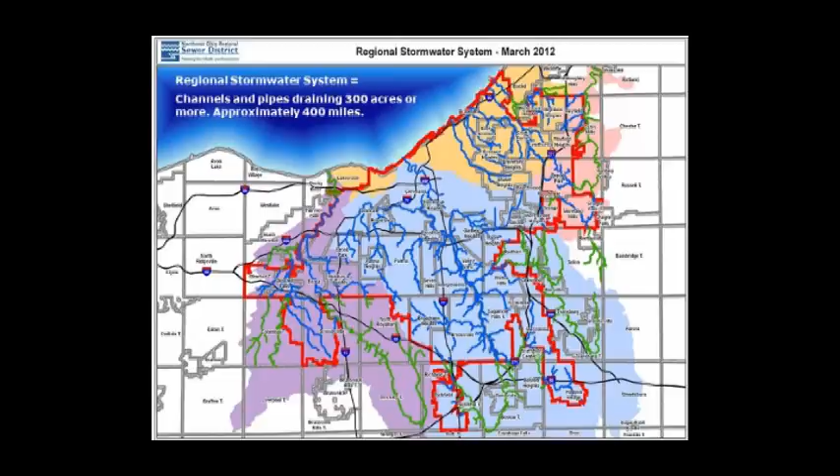And within this watershed area, there are significant streams that cross community boundaries. We use the term intercommunity drainage. The district was charged with dealing with intercommunity drainage problems, and developing and implementing a plan to solve them. Flooding, erosion, and water quality issues are the types of problems that the district's stormwater program seeks to solve. Those are the three big issues, and we're seeing more and more of them because there's more water, and it gets there faster because there's more impervious surface and less percolation into the ground.

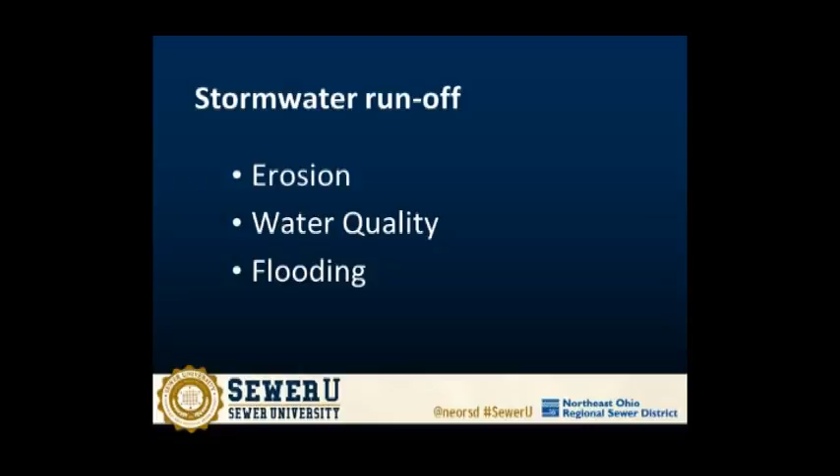We had a mandate back in 1975 for the district to develop a plan to solve intercommunity drainage issues, both storm and sanitary, across the district. We talked about the interceptors—that was part of the plan to solve intercommunity sanitary and combined sewer issues. The district developed a regional stormwater management program to tackle the large stream issues and storm drainage problems.

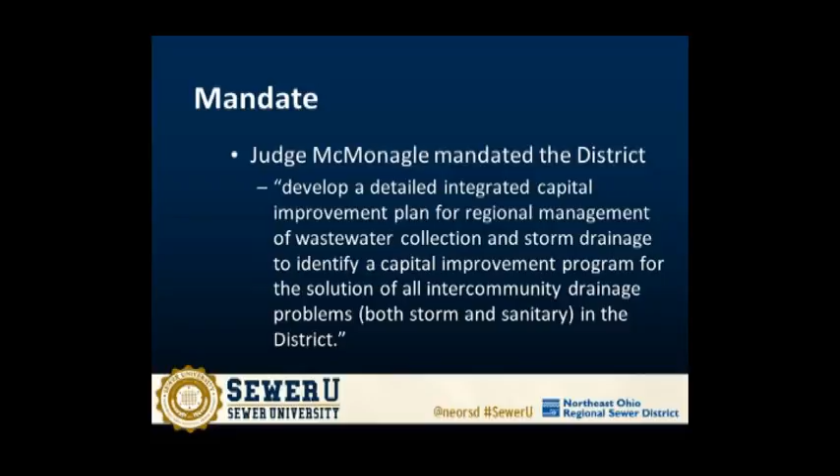We have authority under Ohio 6119, that's our state statute that governs us. The board approved our program way back in 2010. We've been studying this forever. I've been on the stormwater case since '95, looking at this problem, and the problems are growing, and every storm brings more erosion and flooding problems.

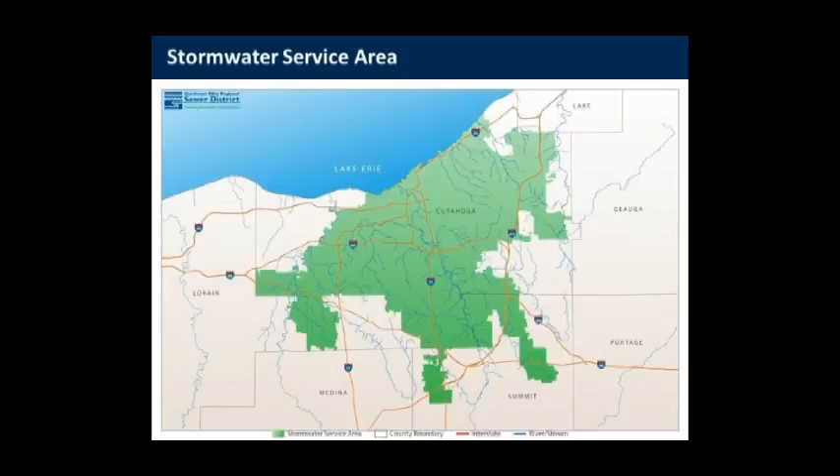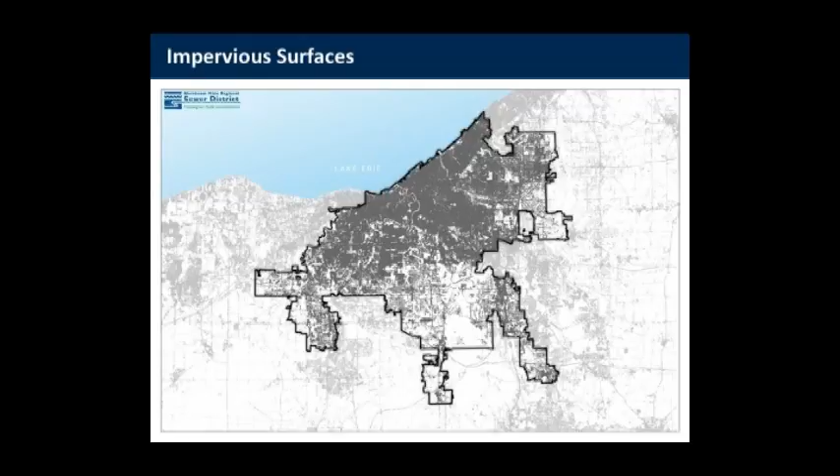And what we've done here is build storm sewers to get the water away from us as fast as possible. When you do that, you introduce more stormwater at higher rates and volumes to streams that really weren't sized to take it. So they tend to resize themselves, and they either flood or erode, and there are all kinds of water quality problems associated with them.

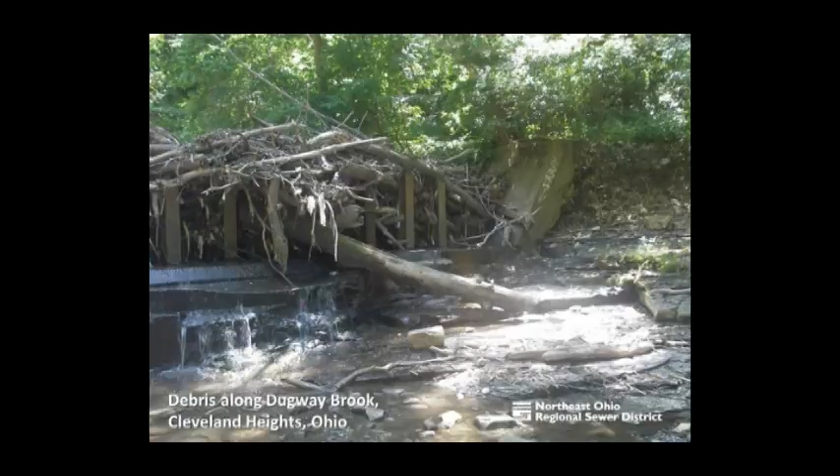There's been a lot of attempts to deal with it. This is a trash rack on Dugway Brook. It's collecting trash, but you have to maintain those facilities and remove the trash so it can continue to function.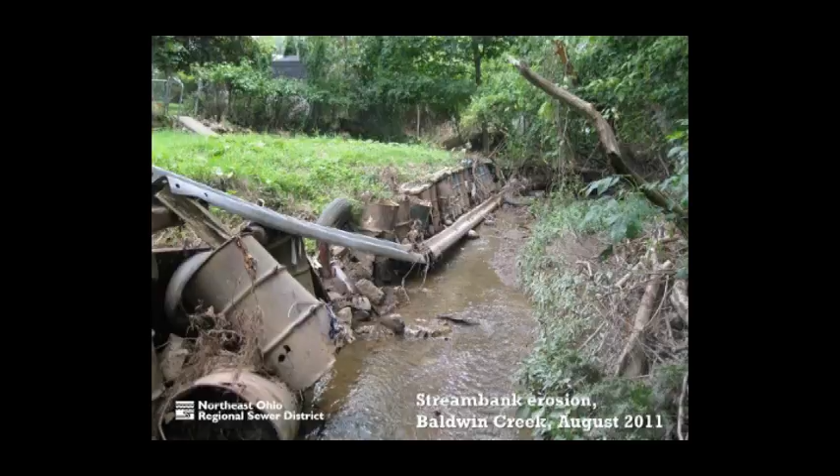This is the Baldwin Creek guardrail, 55-gallon drum, tire solution. Well, these solutions don't last, and we have to do a lot better, and that's what the district's program is geared to do. There's a lot of problems.

228 million was the number we used in 2010. It's grown, it's larger than that. So it's a significant problem that needs to be solved.

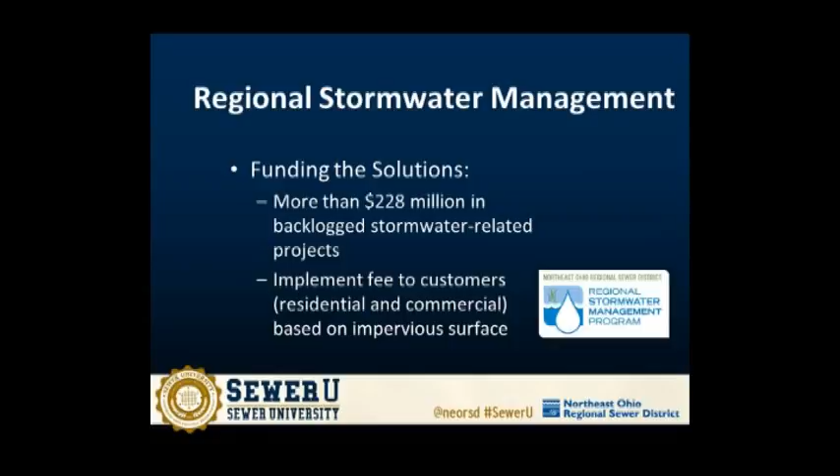So under the stormwater program, to reduce impacts from stormwater to these streams into Lake Erie, we need good master plans to figure out what's going on and what's the best solution. We need to inspect and maintain the system on a daily basis because it's not happening now. We need to construct projects to solve problems, and we want to encourage good practices where we can to allow stormwater to do what it really wants to do, which is percolate downward.

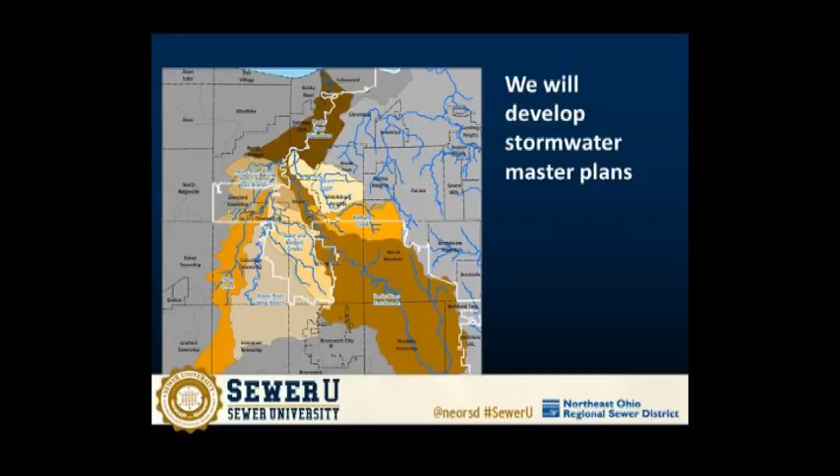So the stormwater master plans will be developed by watershed area. This is an example, I think it's the Rocky. We're going to piecemeal, steadily do master planning across the service area.

The maintenance, our crews are equipped to maintain things like this. When you have debris in front of culverts, you've got to get the debris out of the culvert to make sure that culvert has its maximum ability to convey flood flows. So we've got maintenance forces to deal with that.

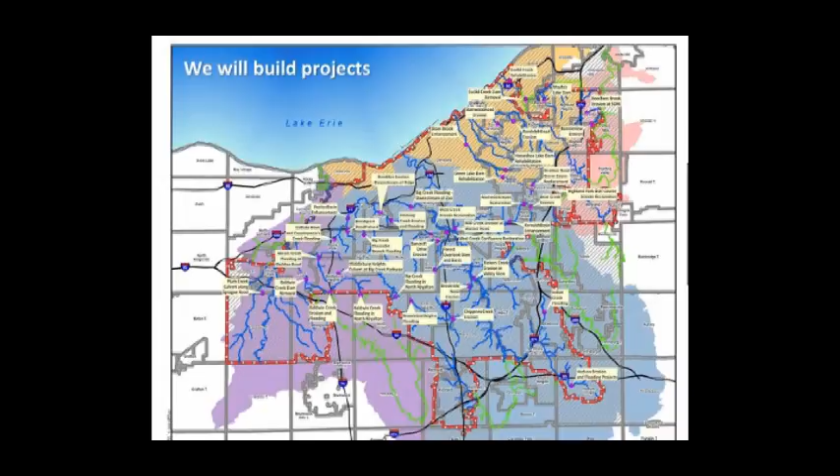Projects are smattered all across the service area, so we need to design, construct, and then maintain projects going forward. And we want to encourage good practices.

And there are credits off of our fees that reward customers for doing the right things to try and slow down, stop, reduce the amount of stormwater coming off their properties. Rain gardens, 25% credit. Rain barrels, a certain number covering a certain area of roof surface, eligible for 25% credit. Downspout disconnect, where allowed by community code, spreading water out onto a grassed area, was eligible for credits. There's other things about removing impervious surfaces and things like that.

Once the program's up and running, the credit manual will be available. It's on the website, and you can see there's a very detailed manual that outlines the practices and the percentages. Okay, this is a demonstration of permeable pavement, one of the technologies and what it can do.

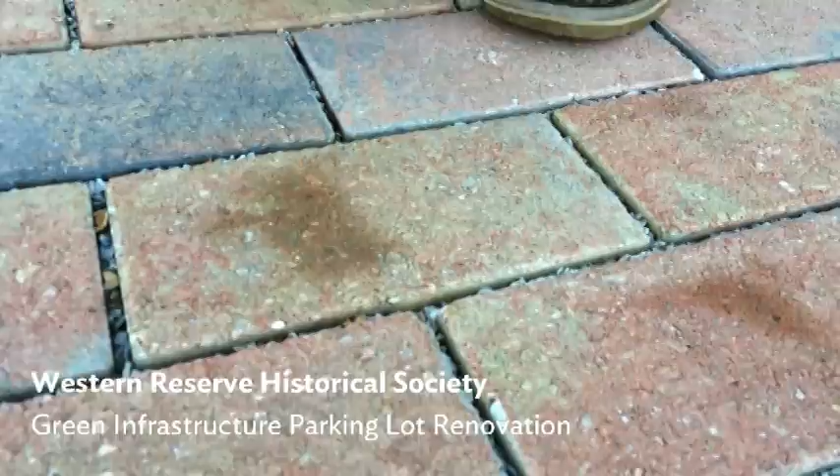Morning, I'm Dave Ritter with the Northeast Ohio Regional Sewer District. We're here at the Western Reserve Historical Society today to do a demonstration of permeable pavers. The Western Reserve Historical Society did a renovation of their parking lot using green infrastructure. The green infrastructure allows the rainwater to infiltrate into the ground rather than running off into the combined sewer system.

So today we're out here with our vac truck from the sewer district. We're going to let some water out of the back tailgate and see how the system works.

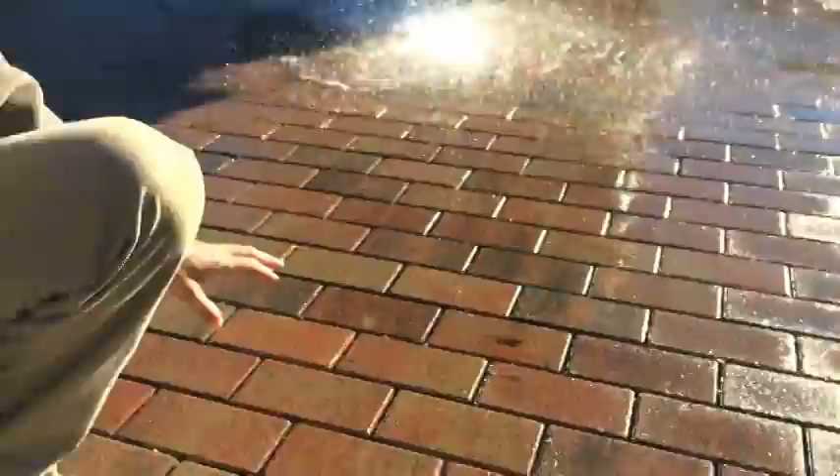So we're looking at the permeable paver installation with actually water being dumped onto the surface. And as you can see, the gaps in between the bricks allow for that stormwater to infiltrate down into the storage reservoir below. So as that water infiltrates through the surface, it'll get down into that storage reservoir and work its way down into the sands below.

While it's doing that, if this was normal parking lot runoff, the gravel in the storage layer does help with water quality as well. Some pollutants are removed along the way. We're really grateful for the support of the Northeast Ohio Regional Sewer District to make this possible, adding green infrastructure to help with water retention and saving on stormwater runoff.

There are 5 opposition communities and another interest representing certain property owners that have filed a motion for the court to reconsider certain elements of their decision, feeling that they did not adequately address a few elements, and want the court to remand those back to the 8th District Court. We, of course, filed our motion to dismiss that, and we're awaiting the final ruling, which we expect soon. Of course, we expected the first ruling to happen much earlier than a year. So we're anxiously awaiting the Supreme Court's ruling and final mandate that they will issue. But we are actively budgeting for stormwater to roll the program back out in 2016, and we're very hopeful of doing so.

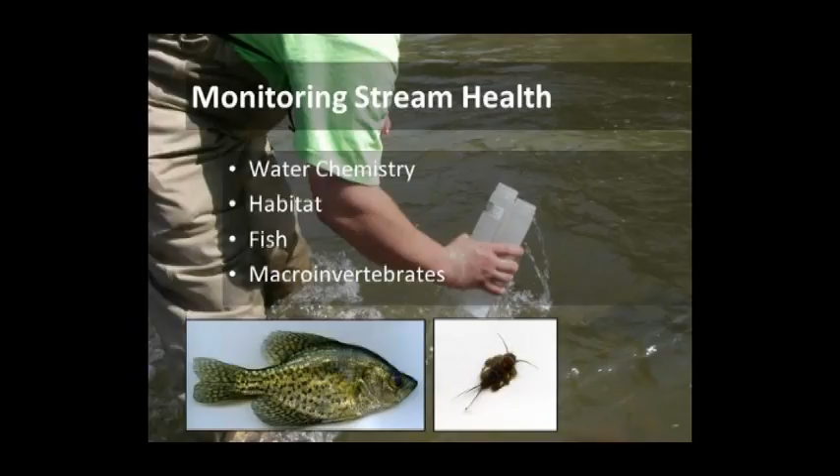To deal with water chemistry, we do a lot of sampling. We either grab samples out of the stream, or we have what we call data sondes, automatic samplers in the streams that routinely collect information. We look at toxicity testing. We look at fish tissue for problems within the fish.

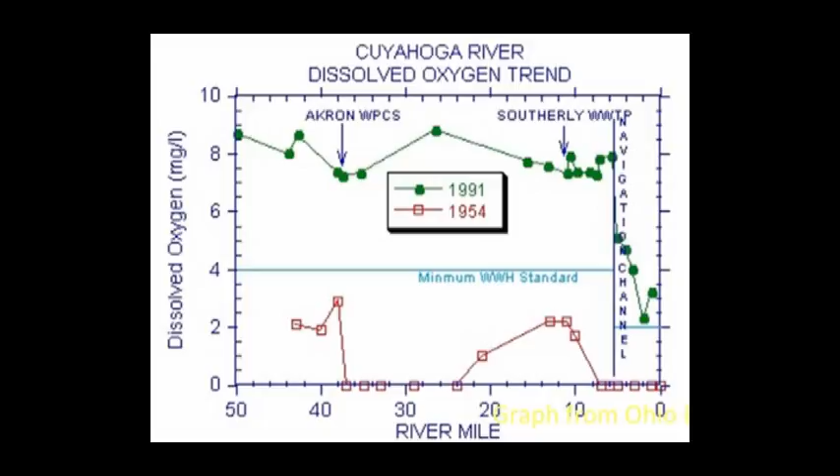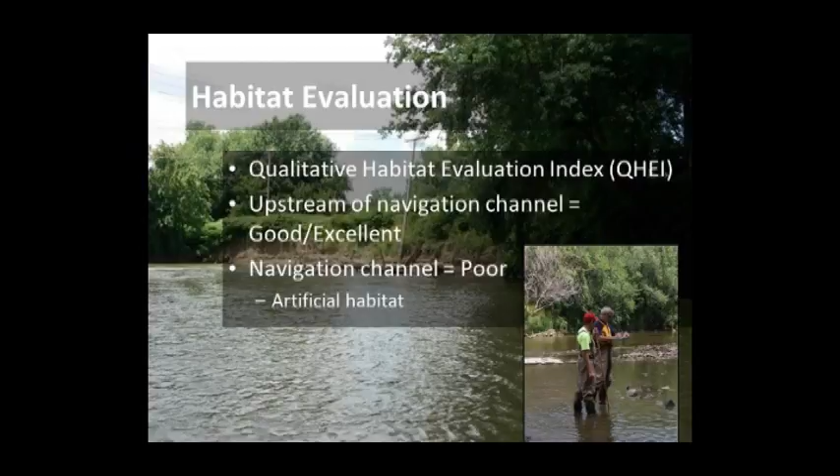We look at what we call the Qualitative Habitat Evaluation Index, the habitat in a stream. What we're seeing is, along large stretches of the Cuyahoga, we're in the good to excellent range today, where we were in the devoid range way back in the day. So a lot of good things have happened. There's still issues in the navigation channel. That channel's dredged routinely, so it's going to be tough to support robust communities in that stretch.

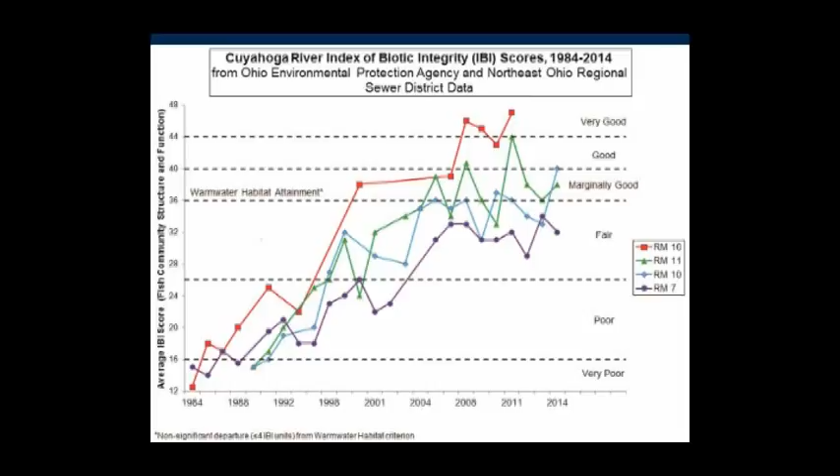Way back in '84, we didn't have a good fish community. But because of a lot of environmental investment, the scores continue to rise, and now we're in the fair, marginally good, and very good range in many stretches of the Cuyahoga River. From my perspective, that's a national success story. This river was burning in 1969, and now we're meeting fish scores in large stretches of the river. That's an amazing development.

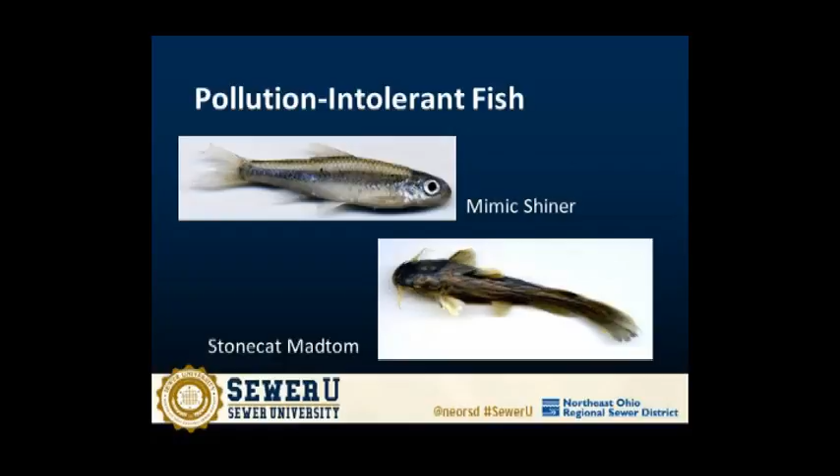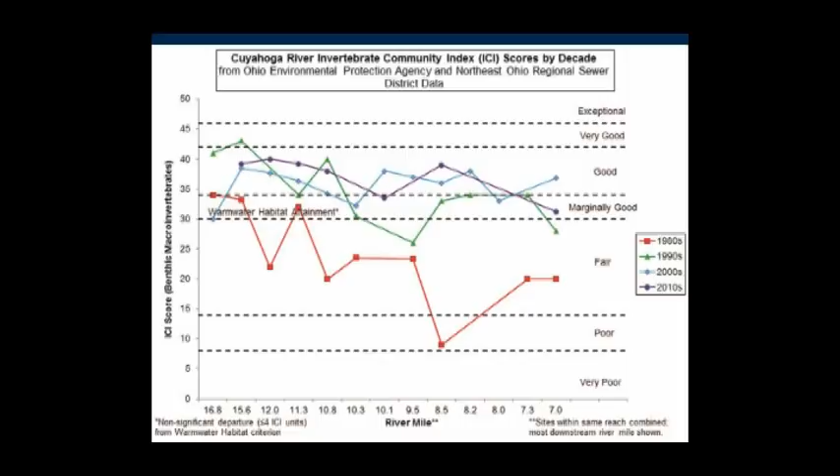We also see other minnows that aren't very tolerant to pollution, and now we're seeing them. We're looking at the bug community in the stream as well. These are called Hester Dendys—artificial substrate we put into the river, and bugs like to colonize between the gaps. The red line indicates the scores back in the 80s. The colored lines—green, blue, and purple—show a tremendous rebound in the bug community. Healthy bugs in a stream mean a healthier stream, and the fish feed off of that. We're seeing a tremendous rebound in that community as well, and we're starting to see things like freshwater mussels downstream of our Southerly treatment plant, where you would never, ever see them.

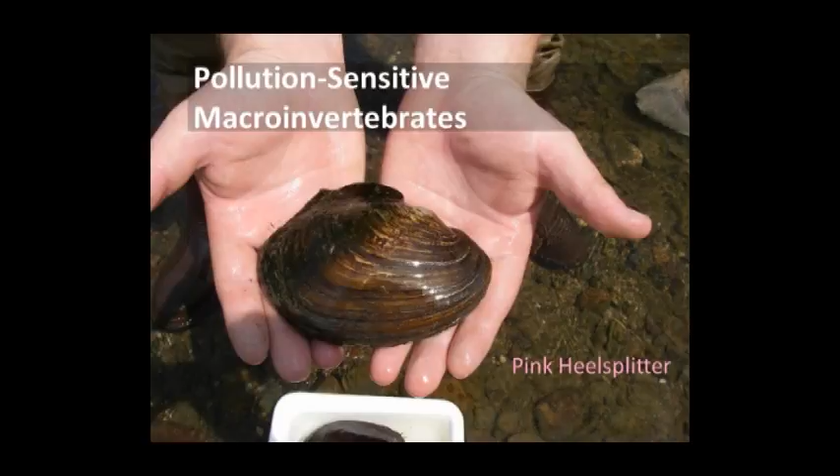Yes? So those bugs that started coming in the summer, I can't think of the name. Oh, the midges? Oh no, the mayflies. One of them, the big ones. And they said it was a sign that our water was cleaner or something?

Yeah, that's right. The mayflies are somewhat pollution intolerant, so they disappeared from the landscape for years. But the lake has gotten cleaner, the sediments have gotten cleaner. The investments in environmental improvements have helped. So we have a cleaner lake, and now we're starting to see mayflies reappear. Some call them a nuisance—that's the price of clean water. That's the way this area was when it was colonized, full of bugs. But a healthier lake is going to spawn mayflies, and mayflies are a good indicator of success.

So there's been a lot of success, but there are some significant challenges. Harmful algal blooms have been in the forefront. We had a bad algae year this year—2011 was horrendous, and last year Toledo had major issues with drinking water. This is a very significant problem on the lake. Again, this was a problem in the 60s and 70s, went away through a lot of investment from point source discharges like treatment plants. Things have changed, and we have algae problems again, and it's going to take a significant investment to deal with it.